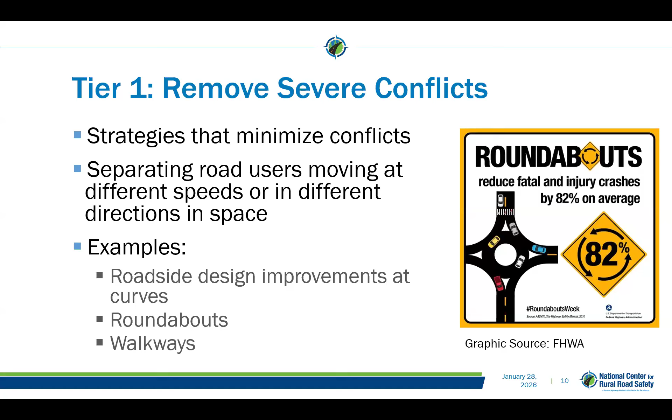If any of you are using Tier 1 and removing severe conflicts in your jurisdiction, we'd love to see those in the chat pod right now. Drop in some of the ways you may be doing this.

Tier 2 is to reduce vehicle speeds. We're going to use design features and speed management strategies for this tier, really trying to reduce the kinetic energy if a crash occurs, to make sure that the severity of the crash is not as bad. As I mentioned earlier, Jeff is going to talk a little bit about kinetic energy in his presentation.

Some examples of how we can accomplish Tier 2 and reducing vehicle speeds in rural areas would be variable speed limits. One example is in Colorado, where they are adjusting speed limits in real time depending on road conditions, in order to increase safety for motorists, such as in winter weather or high winds to try and reduce the severity of crashes.

Another example would be gateway treatments, which could be physical features or landmarks used to clearly convey that the context of a roadway is going to change. I know Wes in his presentation is going to be talking about transition zones, so we may see some examples of gateway treatments there as well.

And lastly, self-enforcing roads is another way to reduce vehicle speeds. Wes will definitely be talking about this piece in his next presentation as well.

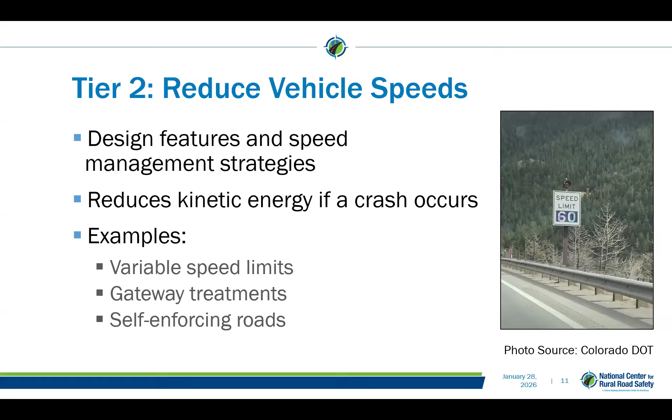Tier 3 in this hierarchy goes through how to manage conflicts in time. This is when we cannot separate our road users into different spaces, so they have to occupy the same physical space. How can we change the time for them to reduce some of this severity?

To do this, we're going to use traffic control devices to minimize these conflicts. A couple of examples would be left turn phasing in our traffic signals, so that we do not have vehicles turning left at the same time that we have pedestrians crossing the roadway.

We could also use this for emergency vehicle preemption. We talked a little earlier about post-crash care - this would help with that piece, reduce intersection crossing conflicts, reduce clearance times, and make it safer for first responders as we decrease crash rates associated with emergency vehicles. Pedestrian hybrid beacons are also another example of how we can manage conflicts in time between pedestrians and vehicles.

Lastly, Tier 4 is where we can increase attentiveness and awareness. In this tier, we're working toward alerting roadway users to certain conflicts that can occur, and then providing them with appropriate actions to take that are consistent with the safe system approach.

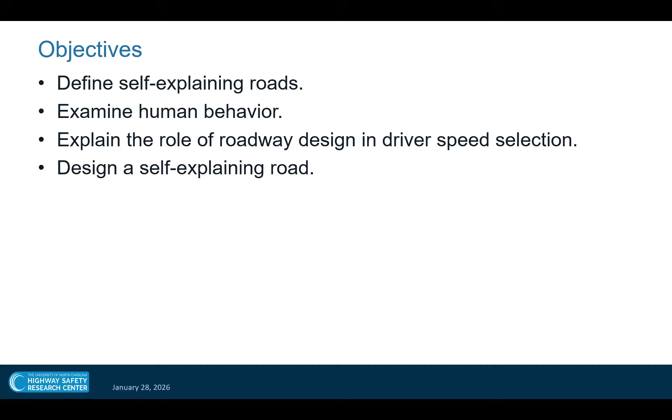Ultimately, we're going to circle back to this concept of a self-explaining road. As Jamie talked about, we're going to look at some different things we can do to try to reduce speeds and provide self-explaining roads.

So let's explore this idea of what I mean by self-explaining road. You may have heard the term self-enforcing road used as a synonym for this. But the definition we see in the research, especially from a researcher named Jan Theeuwes, who is kind of the father of this concept, lays out the idea that a self-explaining road is a road that aligns roadway design with an intuitive understanding of appropriate driving.

What this can mean is that a self-explaining road should guide users to an appropriate speed or other driver behavior without the need for enforcement or extraneous signage.

Whenever we're talking about the safe system approach and thinking about how we can prevent crashes, this question often comes up: where does enforcement fit into all of this? Maybe that's led to a bit of unintentional siloing, with roadway people saying we just need to work on safer roads, while enforcement feels like they're only allowed to enforce speeds.

I would argue that the ultimate goal of the safe system approach is to produce what's called a safe system. Ideally, that means we would have roadways so self-explaining and self-enforcing that we would only need traffic enforcement for very egregious behaviors.

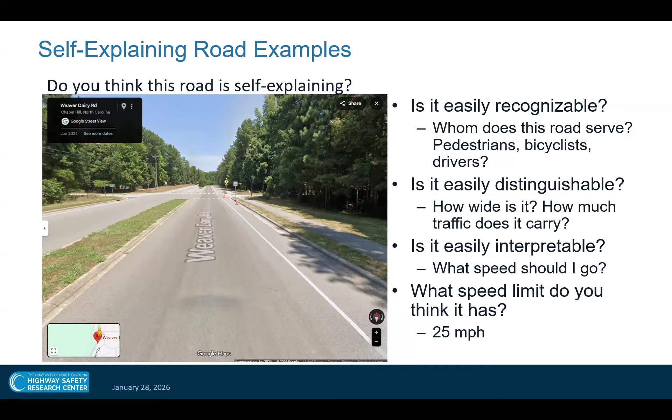The reason I think this road is perhaps over-designed is because there's a fire department at one end of it, and I think they probably designed the road to meet the needs of fire trucks pulling into that fire department. Unfortunately, this means that for the entire stretch of the rest of the road, people are going to be driving well in excess of 25 miles per hour. And yes, one might say over-designed—you might have people driving well in excess of 25 miles per hour while pedestrians are trying to cross those RRFBs, while bicyclists are riding on it. I don't think this is a self-explaining road, and I think we have failed to take into account how people are intuitively going to navigate this roadway.

Researchers who have dug into this concept of self-explaining roads would argue that while some countries, the US being one of them, have a range of different functional classifications, they would probably argue for a much narrower view of roadway functional classification with very discrete designs. You have through roads, which are what we'd think of as freeways, providing the highest mobility and limited access. You have distributor roads, or collectors, which just transmit people from those through roads to access roads. And then those access roads give us door-to-door access.

While we do have all three of these kinds of roadways in the US, one of the big problems is in the big arterials and in that transition, especially with rural areas, trying to go from something functioning like a through road, and suddenly you hit a town and it's functioning as an access road. We have to figure out how to get people to intuit that change in design. So it's definitely a challenge.

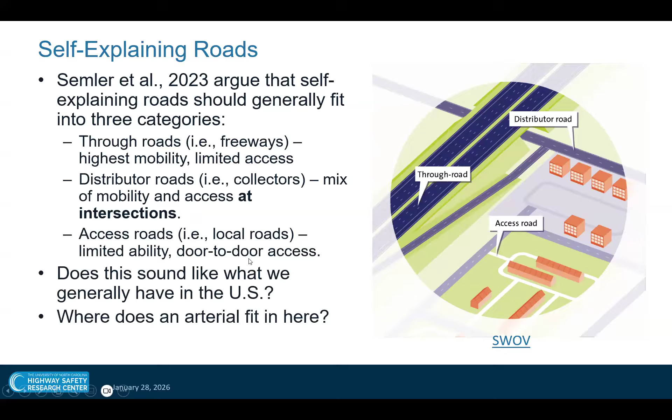So let's take another look at that definition of a self-explaining road, because I want to zero in on this concept of a roadway being intuitive or not. I saw in the chat that someone here is a psychologist, so I'll be calling upon some psychology. Please don't grill me too hard if I'm not representing it correctly, but I think it's really important to recognize how people actually make decisions.

So why is it that people are going to, for example, select a speed? One way to think about this is that a lot of psychology research shows human beings make decisions in two different ways, guided by two different systems. We often assume when designing roadways that people are rational actors who will just follow whatever posted speed limit we set, for example. But that's really not always the case. We also know people are influenced by the environment.

One of the fundamental aspects of the safe system approach is that people are going to make mistakes because we have lapses in attention, for example. One thing we know for a fact is that driving is a very cognitively demanding task, and because of that, people cannot maintain attention for a long period of time.

Just a side note, I don't want to get too far off topic, but I frequently talk with people today, and when we try to diagnose why crashes occur, I'll often hear someone say, 'Well, it's because everyone has cell phones now.' And while I do think cell phones contribute to inattention on the roadway, I'd argue, as other researchers have too, that driver distraction has been a thing for a very long period of time. I think we're missing a bigger picture if we only zero in on cell phones.

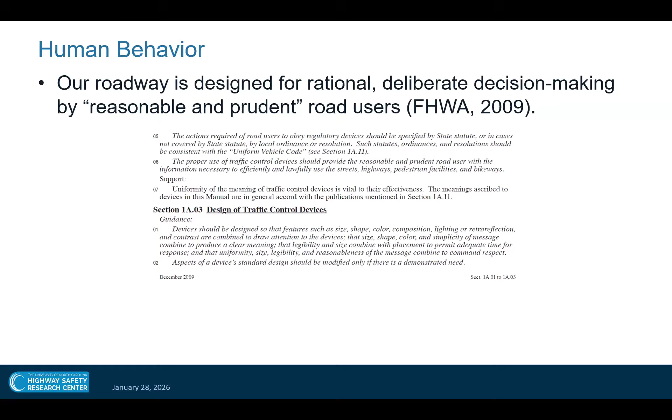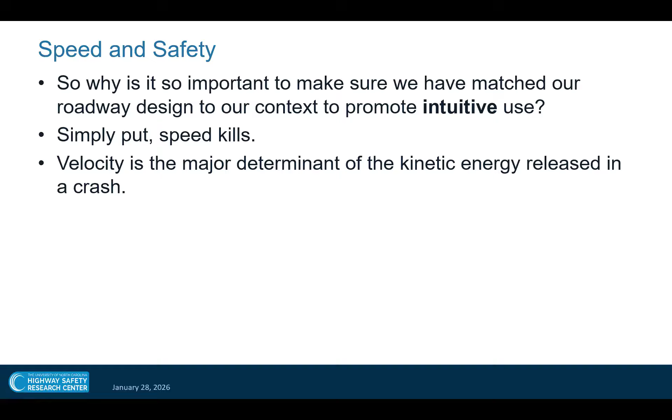Moving on a little bit, if we recognize that we're asking a lot of drivers, and maybe not letting them drive on roadways that intuitively tell them the speed they should select, that sets them up for situations where they're going to be involved in crashes and exposed to dangerous kinetic energy. Jeff is going to be talking a lot about kinetic energy, and Jamie just gave you an introduction to it, so I don't need to belabor these points too much. But I would be remiss if I did not remind you that kinetic energy is dangerous.

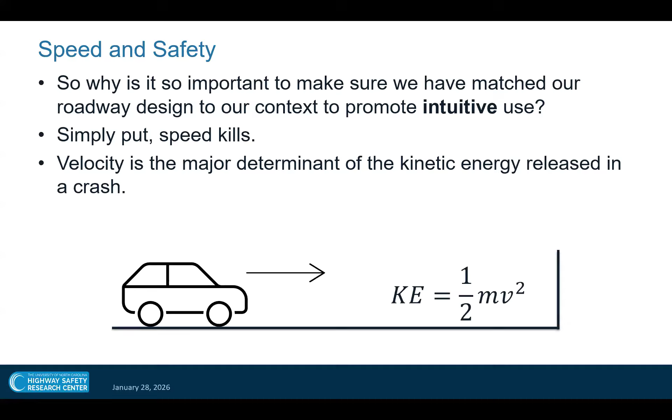So the equation, if you haven't seen it before—if you've seen me give a webinar before, you probably have, because I beat this drum all the time—kinetic energy is one half mass times velocity squared. That means that speed is the killer in our crashes. So we need roadways that intuitively guide drivers to lower speeds.

I think that explanation for why speed is so important is why we see some of the trends I'm going to show you over the next several slides when it comes to traffic fatalities in the United States. We know that for those inside vehicles, safety has nominally been improving. Cars and large trucks are designed much more safely than they used to be, and that probably has driven occupant protection down. But as pedestrians and cyclists are more exposed to high kinetic energy, more people are dying on our roadways.

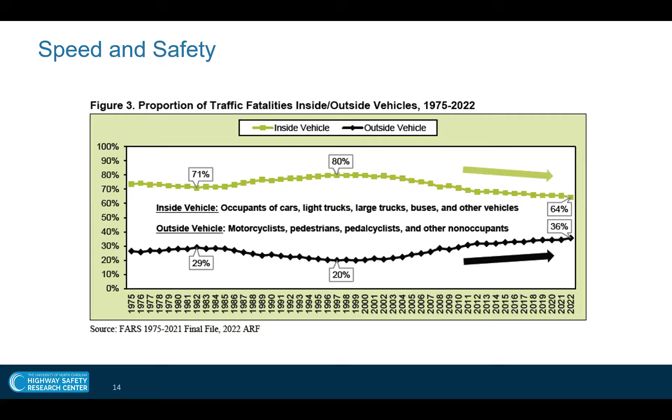We know that about 50%, maybe the majority, of pedestrian fatalities occur at night in the dark. That is a situation where someone will have a hard time seeing a pedestrian, and they're going to be exposed to high kinetic energy. Those situations are ones you might encounter in rural transition zones, and that's why I think this is important as well.

This affirms some of what we've been seeing on the previous slide, where we really see the losses in safety, and the big risks nowadays are in pedestrian and cyclist injuries in the United States. We also know this from some of the work done in New Zealand. I see my friend Shane Turner is in the chat—he has been involved in a lot of the safe system approach work in New Zealand, so happy to see him here.

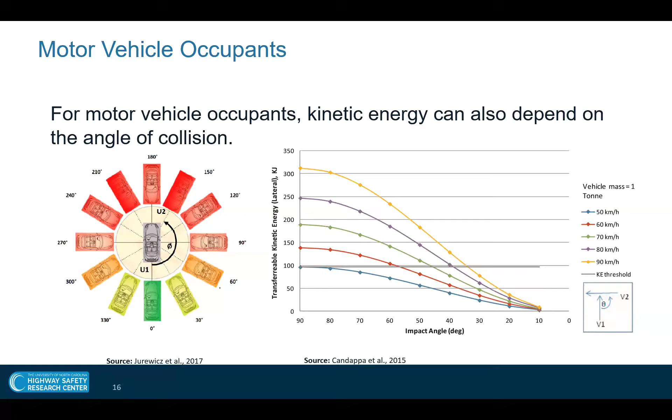We have a good assessment of how fast people can go and still survive crashes. There's been a lot of research showing that as long as you're changing the intersection angle and reducing the speed, rear end crashes are pretty safe nowadays. You see tables like this where, as long as you're changing that impact angle and reducing speed, that kinetic energy is not going to exceed injury minimization.

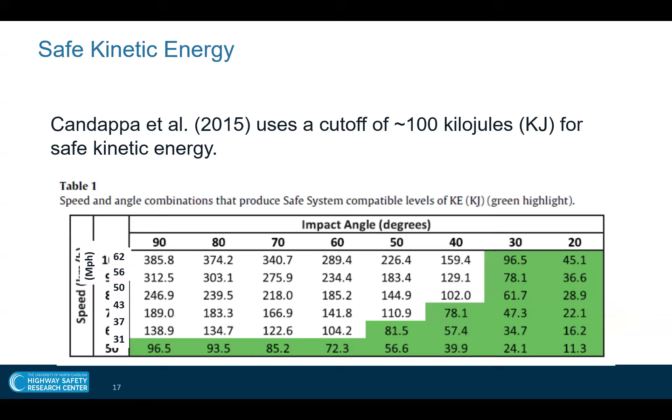Where we do still have a lot of problems is that research has shown pedestrians and bicyclists have around a 10% chance of fatality at even very low speeds, like 18 miles per hour. I've even seen studies showing people have been killed by a vehicle going about 5 miles per hour. So the kinetic energy burden is definitely borne by pedestrians and cyclists, and it's super important that we reduce our kinetic energy through designing self-explaining roads.

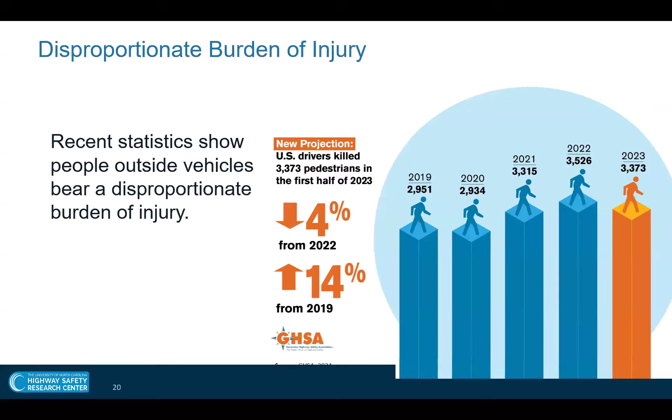We also know that vehicle design has changed quite a bit over time. Our vehicles have gotten a lot bigger, and because of that, there is more kinetic energy, especially as people drive faster. I would argue that's one of the big drivers of pedestrian fatalities today.

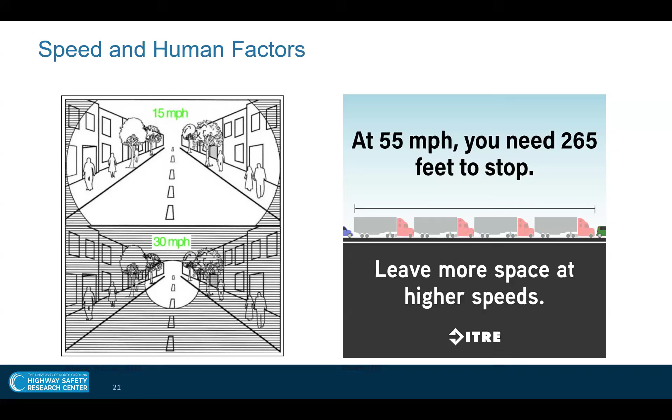We also know that people need a lot more time to slow down depending on the speed they're driving. This could be very important for rural transition zones if suddenly you have traffic appearing in front of you. I'll note, I've been talking about speed generally.

This is a bit of a challenge in the United States, in that most of our crash statistics do not report speed as the factor, but rather speeding as the factor involved in a crash. Some do, but often the speed is only estimated if it was an older crash. I know some vehicles have traffic data recorders now, and there's interesting data coming out of those black boxes nowadays, but a lot of our crash data largely focuses on speeding.

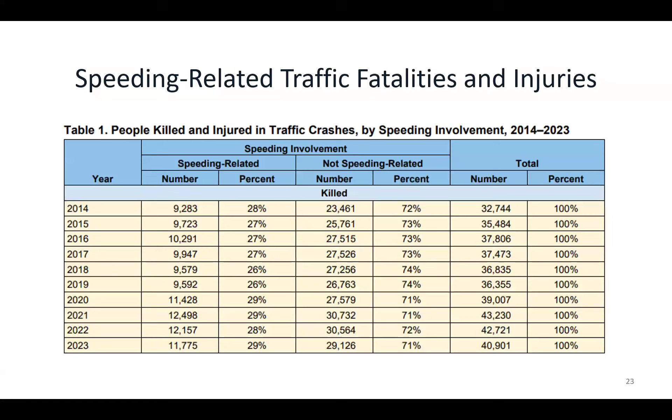My argument would be that even what is legal for speeds is not always safe. We know that speeding as an X factor crosses over with a lot of other risk factors, such as alcohol use and lack of restraint use, and just raises the risks overall. We know that maybe a third of fatalities involve speeding, but I'd argue that the actual percentage of fatalities where speed was a factor is probably much, much higher than about a third.

All of that should take us back to this point: if we understand that people often do not consciously choose the speed they're going to travel, that they're intuitively making decisions on a roadway instead of deliberating how to drive faster, then I think we need to come back to this question of how do we design self-explaining roads?

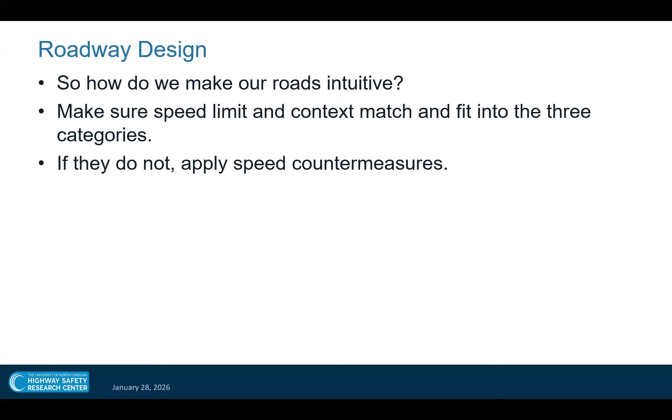Some of this, I'd argue, is that we need to make sure that speed limit and context match, and that we fit into those three categories. One example I really like from a state DOT is the Florida DOT's design manual, because they identify that if you're designing a roadway in a rural area, say a rural town, and you recognize you need to hit 25 miles per hour, it gives you an entire menu of options to get down to that 25 miles per hour. You can do things like roundabouts, lane narrowing, horizontal deflection, speed feedback signs, rectangular rapid flashing beacons. All of these things are appropriate and can help you achieve a self-explaining road.

But what I'd also argue is that we need to get away from just doing speed countermeasures and actually think about how it is that we build our roadways themselves in order to have these transition zones.

So I wanted to look at a rural highway that I used to drive on quite a bit when I lived in Lubbock, Texas. I don't know if anyone here is a Big 12 football fan, but Texas Tech, the first time ever winning the Big 12 championship, I was kind of excited to see that.

Texas Tech and this rural area of Lubbock may be more on your radar than it used to be because of how they did. But this roadway leading from Lubbock out to Slaton was an example of a two-lane highway, signed at 55, maybe 70 in some sections, and then suddenly you're driving into a rural town.

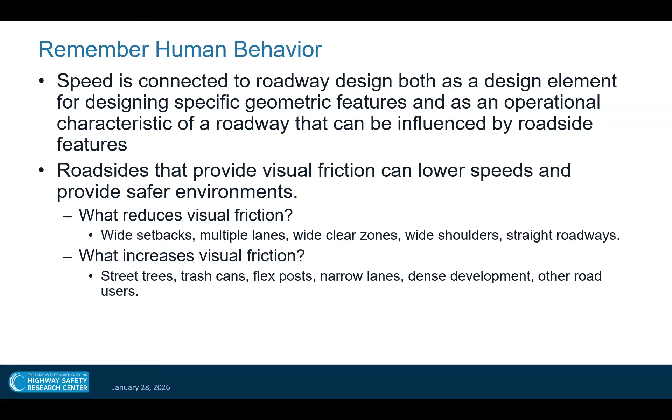We know that reducing visual friction — things like wide setbacks, multiple lanes, and wide clear zones — causes people to go faster, whereas things like street trees, flex posts, or narrow lanes, and dense developments cause people to go slower. These may not all be applicable in rural zones, but we can think about narrow lanes, flex posts, street trees, and other aesthetic treatments that guide people to slow down naturally.

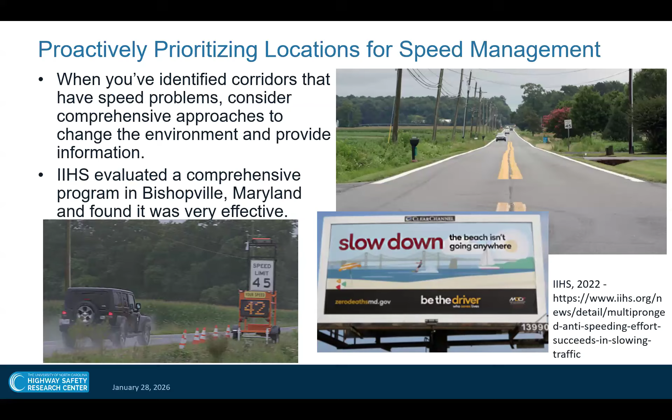A really interesting application of speed management popped up recently — a study done by IIHS in partnership, I believe, with the Governor's Highway Safety Association in Maryland. One thing they did that made the road more self-explaining was painting wider stripes in the middle. They found that increasing that stripe thickness actually got people to slow down, which I think is amazing. It seems like a simple change, but it made the roadway more self-explaining.

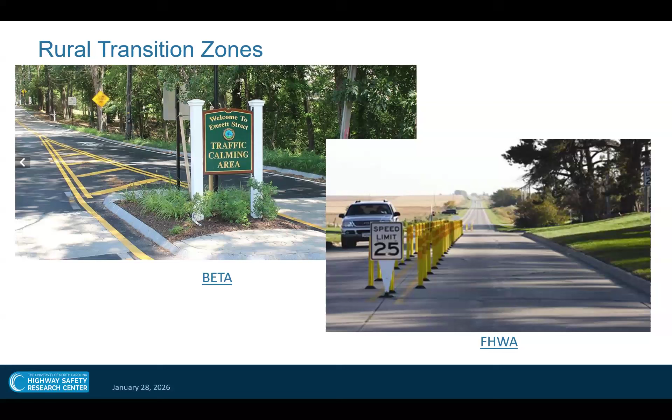Getting back to these transition zones — if we want more discrete roadways designed to transition from a freeway or large highway to local access, we need to think about things like welcome signs, delineators, and trees that create visual friction, to make it much clearer that this is a transition zone. Doing this helps us get down to the safe system pyramid, addressing larger built environment factors that can have much more impact than just trying to get people to make more deliberative decisions about safety.

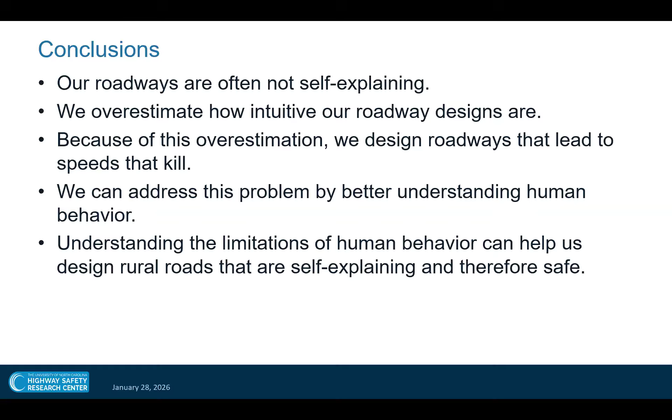In conclusion, our roadways are often not self-explaining in the United States, and we overestimate how intuitive our roadway designs are. Because of that, we design roadways that lead to speeds that kill people. We can address this by better understanding human behavior and looking for ways to design roadways to be self-explaining — through a menu of different options, increasing visual friction, and even just increasing the thickness of the paint on the roadway.

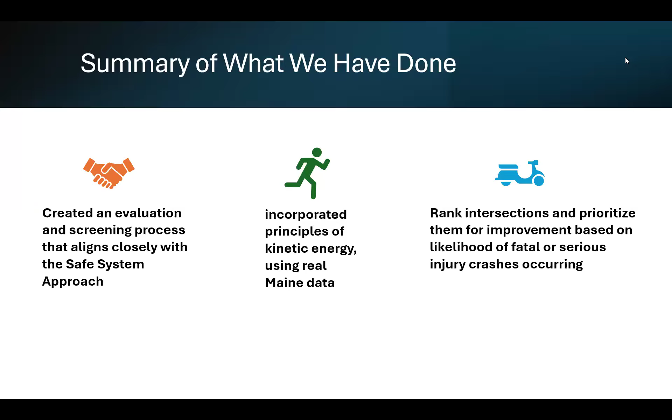And to me, the cool part is seeing how those kinetic energy calculations align with our actual crash data at Maine DOT in the state of Maine. And then we're using this information to rank intersections and prioritize them for safety improvement based on their likelihood of a fatal or serious injury happening.

So what I have is going to talk a little bit about crash forces and kinetic energy theory, and I can go through that a little bit quicker because it's been covered so far, and then show how this information applies to real scenarios in Maine based on real crash data, and then explain the process that we're using to rank these locations and some of the tools we've developed, and then finally show a little bit of performance metrics about how well this has been doing since we started implementing it.

So we've heard a lot about the safe system approach today, as well as humans having a limited tolerance to crash forces and the impact of speed on kinetic energy and crash severity. But look at this figure to the top right of the screen, and many of you have probably seen a variation of this. This shows, based on safe system approach research internationally, how different types of crashes have their likelihood of a fatality change based on impact speed.

Two things you can get from this quickly: speed has a tremendous impact on the likelihood of something leading to a fatal crash. And also, another thing that I think gets somewhat glossed over when it comes to network screening and other crash analysis is that the speed influencing these different crash types is quite different for each crash type. So a lot of the work we've done here has been separating the data by crash type, analyzing those individually, then aggregating it up afterward.

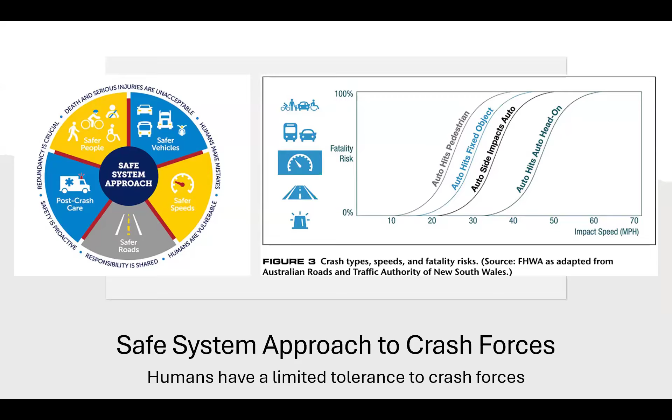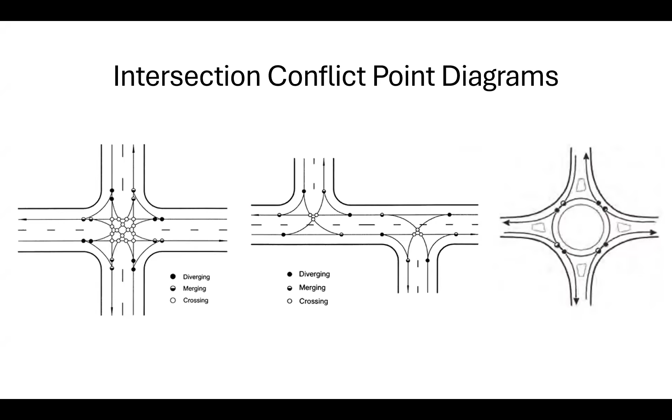So looking at the theory of crash forces, we saw earlier conflict point diagrams and the focus on three different types of conflicts: diverging, merging, and crossing conflicts. Those crossing conflicts are the white dots near the center of the intersection. As Jaime mentioned, you have 32 conflicts here, many of which are crossing in a traditional intersection. At a roundabout, you have much fewer conflicts, none of which are crossing. We've known anecdotally for a long time that these crossing conflicts, which are close to a right angle, are worse, but actually putting some numbers to that and using it quantitatively in our processes is what we've been working on.

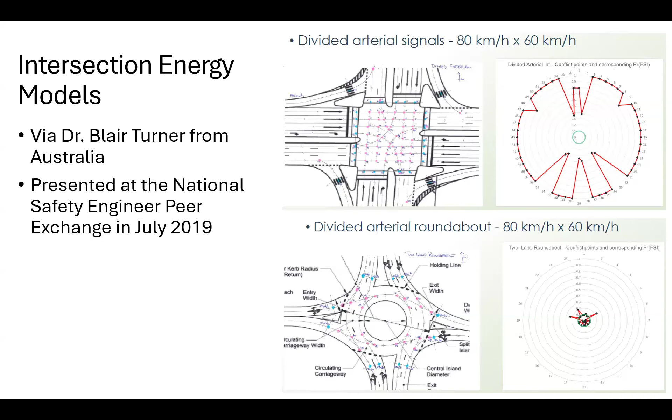I went to the National Safety Engineer Peer Exchange in 2019 in Minneapolis, and we had a speaker, Dr. Blair Turner from Australia, and these are a couple of his slides showing the kinetic energy, represented with the red plot on the right side, for two different intersections. We have a traffic signal with a bunch of lanes and a bunch of right angle conflicts, and then a roundabout at the bottom with a similar number of lanes. You can see the roundabout has way lower kinetic energy than the other one. Looking at this in the US, having less experience with it, it makes sense, but it's still somewhat mystifying about what this actually means and what we can do about it and how we can incorporate that.

The first thing you learn in physics is force equals mass times acceleration. When you think about that for two vehicles hitting each other, the mass part is obvious. The acceleration is really the deceleration, from the speed a vehicle begins with, and then the time it takes, or the deflection distance, to get to the resting point. That's a factor when it comes to hitting the side of a vehicle. Think about how much that vehicle is designed to deflect versus the front, rear, or other areas of the vehicle.

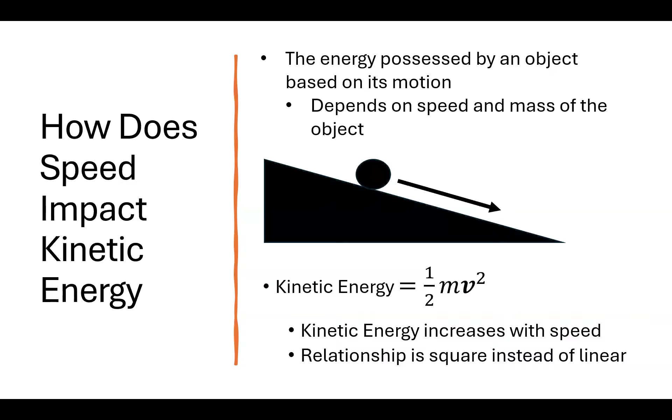It's obviously designed pretty rigid so the passenger or driver doesn't get completely crushed. So a lot of the force is really absorbed by the occupant of the vehicle when you're hit on the side. We see that show itself in the fatal and serious injury statistics for side angle impact crashes. I don't need to get into this much, it's already been talked about quite a bit, but kinetic energy - you see that velocity is not a linear relationship with kinetic energy, it's a square relationship. So as velocity or speed goes up a little bit, the kinetic energy can go up a lot. We'll get into specific examples of what that actually looks like.

Kinetic energy has been mentioned in International Safe System Resources as closely tied to fatal and serious injury likelihood. And we've seen that very close relationship based on Maine data.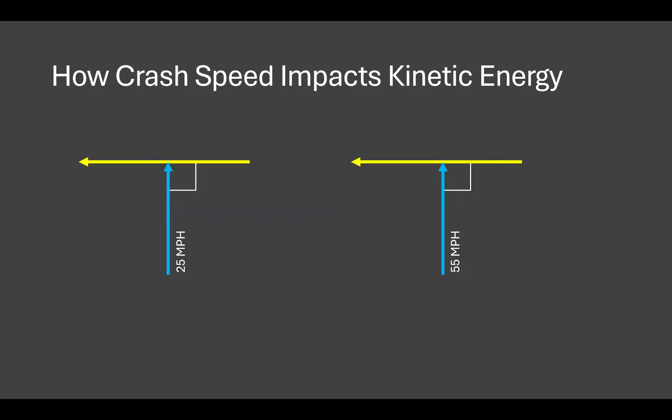Now, on a more extreme situation, we've got a 25 and a 55 mile per hour collision. The speed is 2.2 times higher. The kinetic energy is almost 5 times higher in that situation.

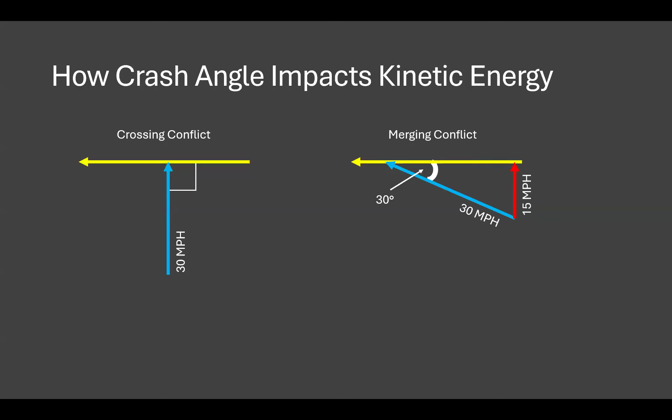Then what about impact angle? So bring you back to relative velocity, vectors again, to get to the relative velocity. How much of this speed is actually going into the direction of the yellow vehicle? If you have a 30-degree angle, like a merging conflict, only half of that speed is actually going into the direction directly into the yellow vehicle. So the relative speed is twice as high on the left as it is on the right.

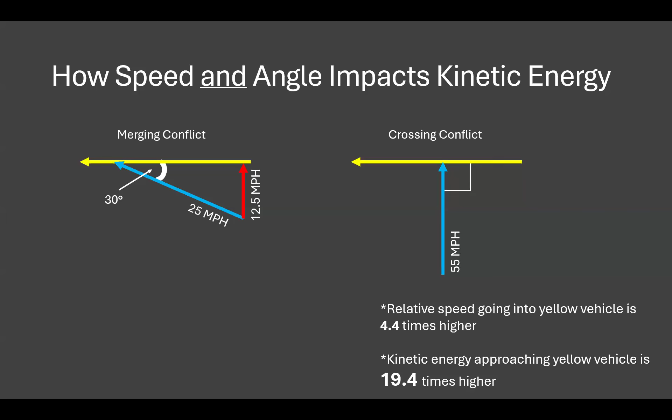Now, if you put those two theories together, we've got a merging conflict at a low speed and a crossing conflict at a high speed. This turns into very different forces. It's intuitive, but putting some numbers to it can help. The crash on the right has almost 20 times higher kinetic energy going in the direction of the yellow vehicle. And that actually aligns pretty well with crash data, which I'll show you.

So how do we apply this theory to the crash data itself? The first thing that we did, even before we got into the weeds of this effort, probably 5.5 years ago, we looked at our whole data set of intersections in the state of Maine, and we broke down the angle crashes, or what we call intersection movement crashes in the state - which could be left-turning crashes, right-turning crashes, or crossing conflict crashes, but crashes happening in the intersection. And we broke those down by primary road speed limit.

What we found was every 5 miles per hour the speed limit went up, the injury percentage went up, as well as the fatal and serious injury percentage, and the KAB - minor injury or worse - crashes. All of those metrics went up when we looked at the whole entire state for every 5 miles per hour. That's not to say that just by changing the speed limit sign, you may see a huge difference here, and maybe someone is going faster on a 30-mile-an-hour road than an individual 35-mile-an-hour road.

But over the course of the whole entire state, you would generally see each one of these locations - you'd have 35-mile-an-hour roads, people going a little bit faster than 30, and so forth. So we started using this and bringing it to towns when we were looking at high-speed angle crashes and proposing solutions, saying, hey, maybe you had 2 serious injury crashes here, but based on this data, you're actually lucky. Based on the crashes and the typical rates we see, we actually should have had more here.

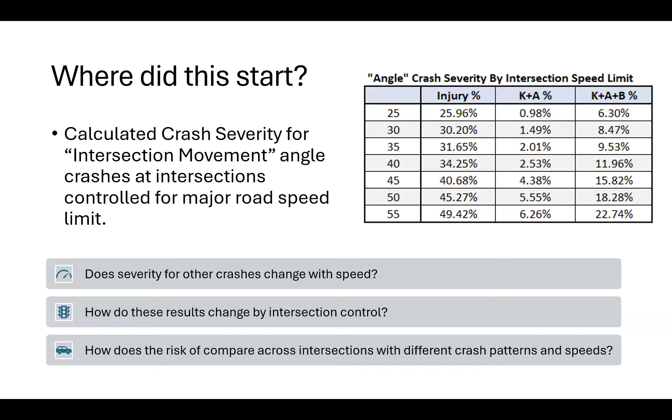So how do you compare a location with 5 angle crashes at 50 miles an hour to a location that's 30 miles an hour with 2 pedestrian crashes? Which one is worse, and which one should be prioritized higher than the other? So we've worked on that and built a system where we can quantitatively put that all together in one place - a connection between kinetic energy and K+A percentage. We calculated the fatal and serious injury percentage for basically all our intersection crashes in the state.

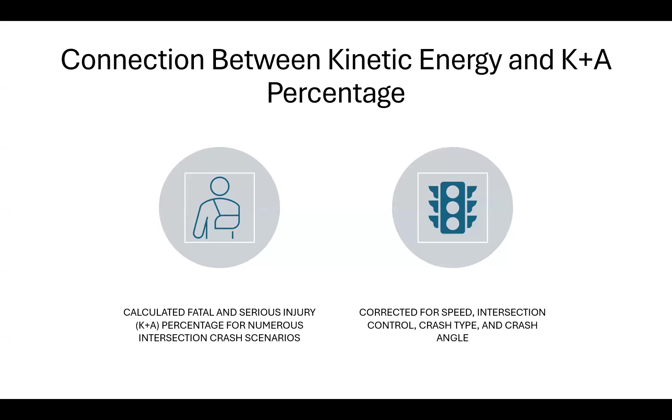We look back at crash data, a really long history of crash data, in most cases 10 years of data throughout the state. For pedestrian and bike situations, we have limited data, so we went back a full 20 years. We basically put things into bins by crash type, speed, and intersection control. We controlled the primary road speed limit - we didn't have actual speeds, but the speed limit is enough to get you started. We separated all-way stops, roundabouts, and traffic signals, and put everything else into one combined bucket. We were able to adjust based on crash angle.

So how do you account for crash angle in the data? For those who haven't dug into crash data, it's a little different state to state, but within a crash you have crash level data, driver action level data, and vehicle level data. In Maine, within each vehicle, we have a most damaged area category that police have to fill out for every single vehicle in every single crash.

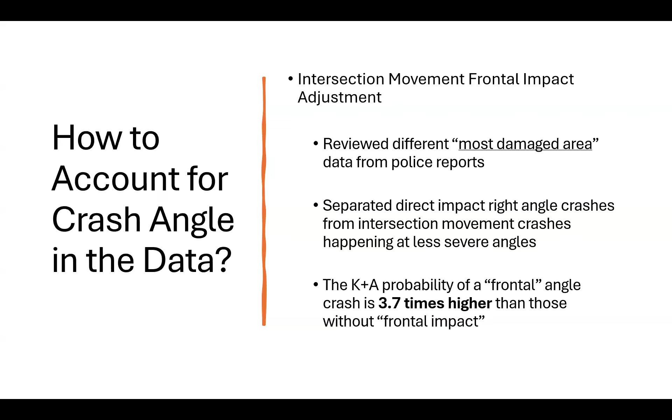We looked at 5 years, eventually 10 years, of intersection movement crashes. The most damaged area goes into different categories - front passenger side, passenger center, rear driver corner, and so on. We took the percentage where the most damaged area on one of the vehicles in the angle crash is front - that's a placeholder for a close to right-angle hit, if the most damaged spot is the middle of the front of the vehicle. I wasn't sure how many would actually be coded that way - you never know until you look. It was about 53% of intersection movement crashes coded that way.

So we said those ones are right angle, binary, and the others are not right angle. When we split it up that way, it was a huge factor in the fatal and serious injury percentage - the crash severity. Frontal impact crashes were almost 4 times more likely to lead to a fatal or serious injury crash. So we decided we need to start working this into our screening method to consider that risk.

We had some other corrections. One was all-way stops, which gets into treating high risk crashes. If you think about an all-way stop, our biggest worry when we put them in is whether people will see the stop sign and stop at it. Because if everybody stops and then starts and hits each other in the middle of the intersection, they're probably going to hit at 10-15 miles per hour, and I have pretty low worry about that turning into a serious crash. But if someone blows through the stop sign and hits at 45 miles an hour, we've got a situation similar to a free-flowing approach.

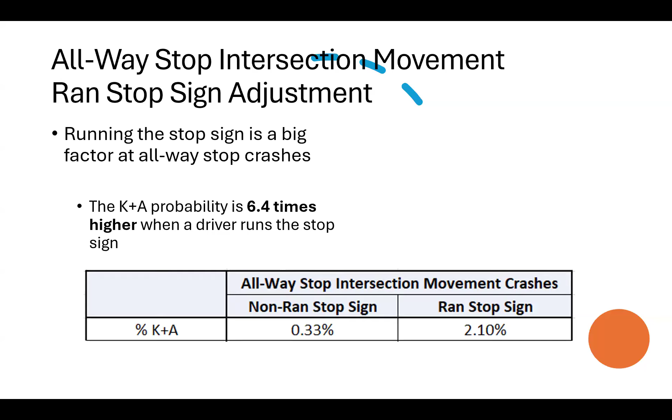We found that when people run the stop sign - which is a driver action in the police data - it's over 6 times more likely to lead to a fatal or serious injury crash than the ones that don't. So we started to incorporate that into our system as well.

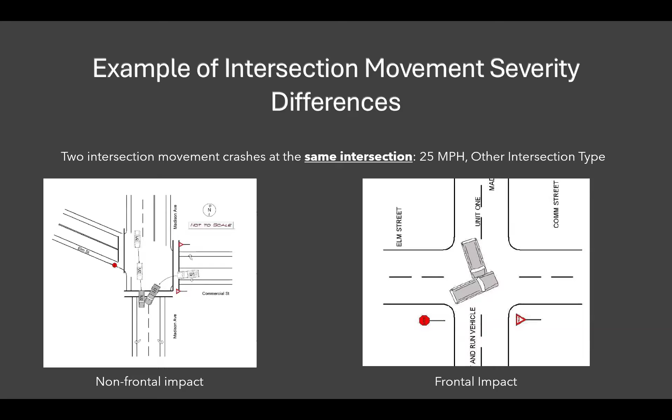This one's a little unique, another intersection control - not signalized, not roundabout, not all-way stop. We've got a merging conflict on the left, a left turn into a lane, so that's pretty close to a 30-degree angle, but it's a non-frontal impact, not a crossing conflict. At the same intersection on the right, we've got a true right angle crash - someone crossing at nearly a right angle and impacting each other.

And what we found from our data, similar to what I mentioned on a previous slide, is the crash on the right has about a 1.8% chance of leading to a fatal or serious injury. The crash on the left is about a 0.5% chance, and that's 3.6, 3.7 times more likely to lead to a KNA on the right than on the left.

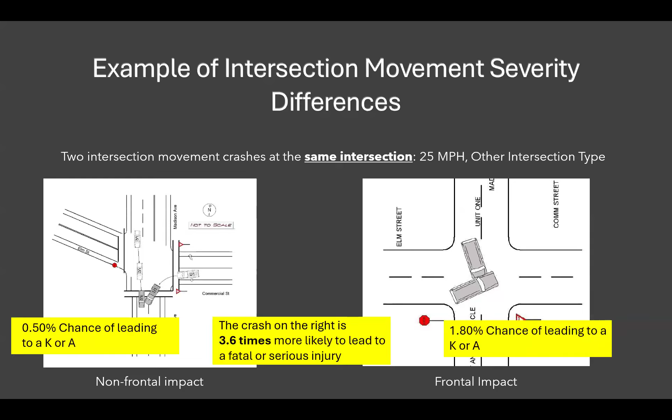If you take this in the bigger picture, we've got that same low speed merging conflict crash on the left, and a high speed right angle 55 mile per hour crash on the right. The crash on the right has over a 10.5% chance of leading to a fatal or serious injury based on that Maine data, which is just over 21 times more likely to lead to a fatal or serious injury than the one on the left.

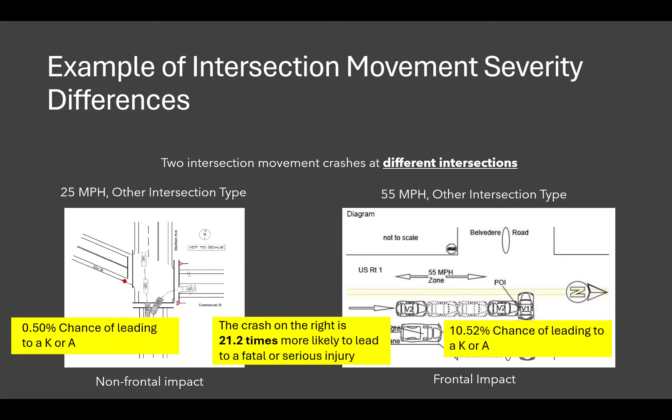If you remember back to those vector diagrams, those two scenarios we looked at were 19.4 times higher likelihood. So these are actually very, very close to the kinetic energy changes between those two. Especially for angle crashes, the crash angle and the speed for intersection movement crashes, it's an extremely close correlation between the kinetic energy difference and the likelihood of a fatal happening.

And then looking across different crash types - this is an intersection in an urban area of Bangor, Maine, and this is a crash diagram on the right. The first thing you see, traditional traffic engineering, you'd say okay, there's all kinds of rear end sideswipe type of crashes here. The traditional method would be the best way to make it safer would be to reduce the type of crash that's most frequent at the intersection, which would be the rear ends. There is one pedestrian crash here.

So the question is, how do the risks of all the different crashes we have at this intersection add up, and what is the greatest risk here that should be focused on to improve safety?

So we have 13 rear end sideswipe crashes here at a signalized intersection. Our data across a lot of crashes across the whole state shows that's a really low risk crash type - it was 0.21% chance of leading to a fatal or serious injury. This 25 mile per hour intersection pedestrian crash was almost 17%. So that one pedestrian crash has over 6 times higher risk of leading to a KNA than all those other rear end sideswipe crashes combined.

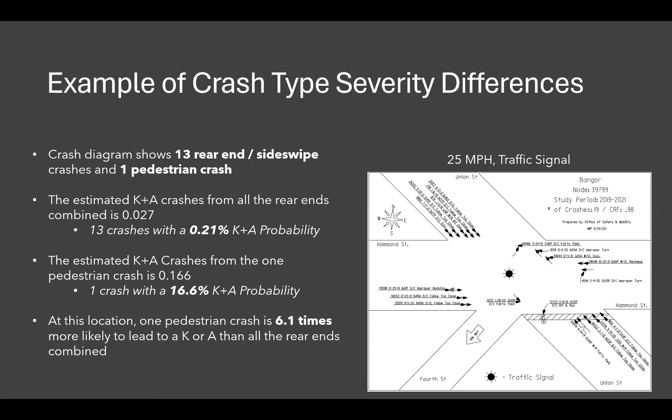So once you start to get down into the weeds of what's the greatest risk at an intersection and what countermeasures we should be working on, sometimes this could be a helpful tool that way, but really we're mostly using it in the screening method itself.

So getting to the screening method, we called it KNA potential, but it's just our kinetic energy risk based on actual crash history in those factors that I mentioned already. So why create another screening method?

We had a few screening methods that really weren't meeting our expectations. We had a high crash location rankings list, which was really based on 8 or more crashes in a 3-year period, and something called a critical rate factor greater than 1 - that's a crash rate compared to the crash rate at similar intersections throughout the state. There's nothing in there about crash severity or crash type or speed or any of those things. It's really kind of a crash frequency and crash total metric, and it's been around for many decades. People are used to it in the state.

Around 2015, 2016, I think we put in a highway safety manual screening. This was a little bit before I got to the safety office, and we have network screening level, AADT, some CMFs built in there for left turn lanes and other things like that. It calculates the predicted crashes and then calibrates that based on 3 years of crashes at the intersection, correlates that to crash costs, and then finds the excess cost - the difference between the expected costs and the predicted costs.

All of that still, the observed data that's put in, the way Maine has it, didn't consider the crash severity of the observed crashes, and it only looked at 3 years. And I'm seeing a lot of limitations when you're only looking at a few years of crashes - you're not getting the whole picture out there. I know the push for that is that things change at an intersection - if you look back too far in the data, you're going to see things that aren't relevant anymore. But in practice, I don't think that's as common as we want to believe it is. The HSM models also in Maine anyway, become a poor fit for the true outlier intersections.

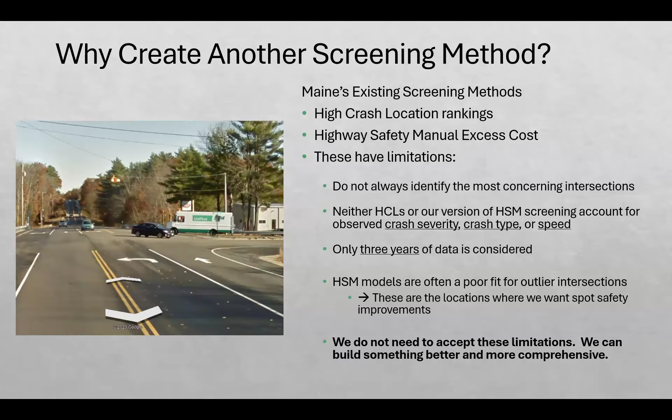So we needed something better at those outlier worst locations to prioritize them and figure out what the true level of risk was. So this KNA potential that we came up with, it's our estimated number of fatal and serious injury crashes we would believe would happen over the next 10 years. Big assumption if the current crash patterns were to continue.

And also, another way of looking at it is a ranking of the intersections where fatal and serious injuries are most likely to occur.

So at a basic level, we look at a couple of things. We look at the crash patterns that are there, and then we look at the actual fatal and serious injury crashes that have happened over a long time period at the intersection. We use that as kind of a straight face test calibration to incorporate that and not just have the theoretical severity.

So how do we quantify the crash patterns? It's different than everything else, but it's pretty statistically naive. We just go into all those different ways we divided crashes at an intersection, and we say, multiply that type of crash and the number of them at the intersection by the percentage chance that leads to a fatal or serious injury.

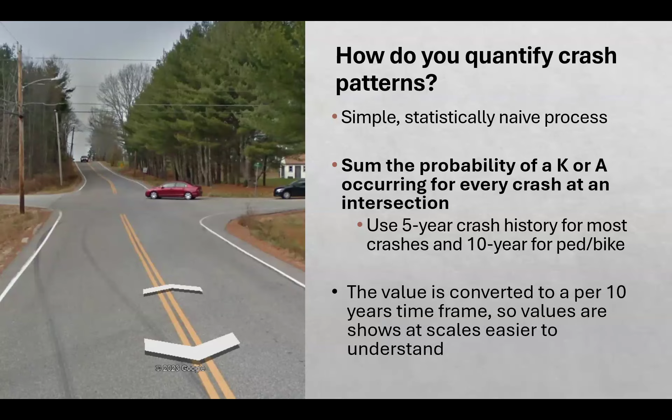We looked at the 5-year crash history for most crashes. For ped and bike, which are less frequent, we looked at 10 years. We convert that all to a per-10-year time frame and then add up the risk. So for example, if something had a 5% chance of leading to a K or A crash, we would call that 0.05 KNAs, and we do that for every crash, sum it all up, get one big number. That was kind of a sub-metric we call the crash pattern potential.

This is a more detailed way to do that if I had more time to get into it. Then we have the other part of that, it's the KNA history.

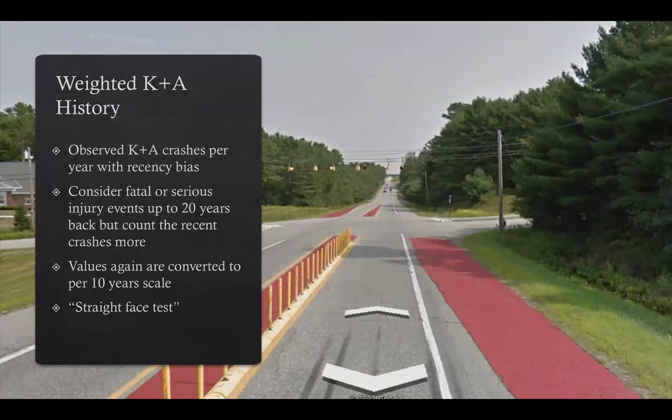So we call this the weighted KNA history because we're intentionally building in a recency bias, where we want to consider fatal and serious injuries that have happened here over a very long time, but we want to consider the more recent ones in a greater quantity. And like I said, this is really our straight face test.

So when we look in Maine at our locations with the most KNA crashes at a single location, as Jaime said, in rural areas, they're really dispersed. So we are a very rural state. And when you add it up over 5 years, we only have a few locations with 3 KNA crashes at one location, and then it drops off. But if you start to look at more timeframes — 10 years, 15 years, 20 years — the outliers really start to introduce themselves.

And then you get to the situation where you've got 4 KNAs over 10 years, and no matter what the crash pattern says or the other metrics, when you have that many, you shouldn't be shocked when a 5th one happens. You have a trend in itself that there's severe crashes happening here, and we should be incorporating that into our strategy.

And I've gone to towns and brought them safety data and talked about an intersection, and they tell me about a fatal crash that happened 8 years ago or 11 years ago. And I can't look at them with a straight face and tell them that crash is irrelevant to our analysis, because it's not. We've tried to do that before, and I've left thinking, we're wrong, something's wrong in our process. Nothing substantial has changed here. Maybe we've trimmed some brush, maybe we put in a different static sign, but nothing that has gone far enough to make that old fatal and serious injury irrelevant.